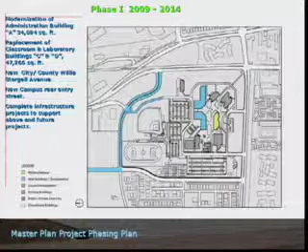In each phase of the project, you're going to have to do infrastructure work, which will probably be talked about later when Chevron talks. That's a major issue - in all the campuses there are infrastructure projects that have to take place. In order for these projects to work, the new buildings as well as the modernization of existing buildings are all going to need infrastructure upgrades to accommodate it.

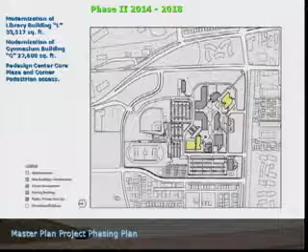The next phase are projects that are actually in the queue and have been sent into the Chancellor's office before - the modernization of the library, Building L, and the modernization of the gym, as well as the redesign of the center core of campus, which would occur as part of this phase, the expansion of that work.

And then the last phase is to complete all the pedestrian entries that we're talking about. And then we have a couple other proposals that have to do with this last phase, which again have to go through a process to determine.

One of them is, because of this new entryway into the campus - you can currently get into campus that way, but it's kind of a back way now - you currently have your diesel building right there, that's highlighted here. We're proposing to relocate the diesel building to this location adjacent to the auto shop building, so you create this core of auto-related functions that all occur together.

We build the wall around it. We also take away the existing cars that you have stashed in the parking lot here, to clean up this parking lot so it becomes a space that's usable and functional. So you contain all those auto-related functions behind a wall that's enclosed and not out in the open, and not a major eyesore for the campus.

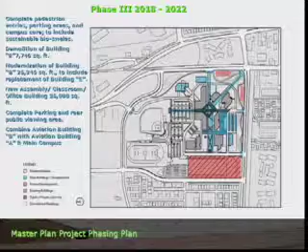And so you create this zone of auto, diesel, and repair work. The potential exists in this area for some kind of signature building that becomes another focus point as you come into the campus and look across. One of the ideas is that there's potential in the future for some square footage for an assembly classroom building to occur at that location. So we're proposing this as a future building location.

Then we talk about completing some of the parking work that needs to be done, and the possibility even of moving some of the aviation functions, not all of them, from here onto the campus into this core area as well. And then there's also the possibility, if this campus grows even more, that you have building areas here and here.

A third thought is in this area where you have the large parking lot. One of the discussions we had was about public-private partnerships and the ability to create zones on each of these campuses that can be used for some form of public-private partnership, or some way the district can develop land that can generate income for them, other than having to live off of the state only.

So one of the ideas is to take this quadrant, relocate the Child Development Center, the CDC - that can be relocated into an area over here, or here, or here - and take this swatch of land and have it available for some kind of future development with some other partner. That's one of the ideas. In each of the campuses, we looked at the possibility of some form of public-private partnership occurring. And so that's the final plan for the campus.

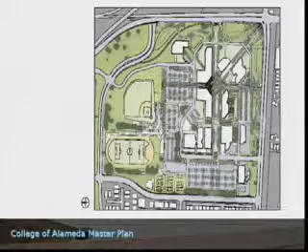Okay, now Merritt College is the next one. Again, we had town halls at Merritt. Some of the same issues exist at Merritt regarding the identity of the campus, wayfinding on the campus, difficulty finding your way around, and not having a really defined quad or center to the campus. Some of the same issues you had at Alameda existed at Merritt as well. And they talked about trying to build out some of the facilities, particularly some of the athletic facilities they had, and some of the things that were in the original master plan for the campus.

These are some of the students who were part of that process, and they had some recommendations regarding movement of some of the facilities, including the student center, to a more centralized location, which we'll talk about in a moment.

And again, the same process of assessment and analysis to come to a facility master plan. These are the areas of concern: define the main entrance, wayfinding on the campus, define the core of the campus. Taking advantage of the views is very important at Merritt, because that's one of the real attributes that campus has - the natural environment around it and the views you have from it. This is the existing campus itself.

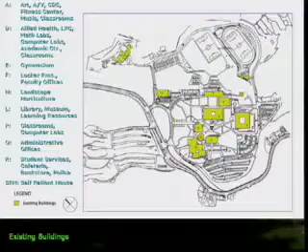Again, a view of the campus in its environment. The zoning map for the campus. Basically, it's all campus, all institutional up there.

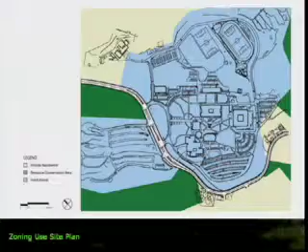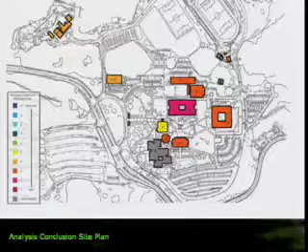And this is the assessment that was done, the physical assessment of the campus. Blue being the best buildings, going down to red being in the worst condition. The R building was not assessed because at the time they were just completing the modernization of the Student Services building, and some of the portables were not assessed. Again, the buildings are, as you can see, not in great shape in terms of what needs to be done to them.

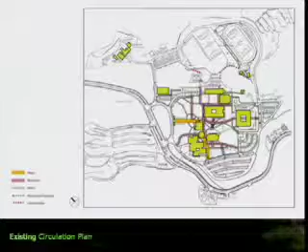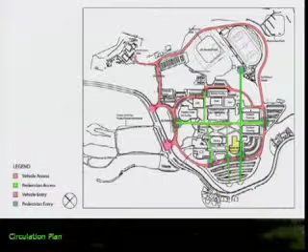This is the current pedestrian circulation on the campus. This is how we're proposing to reorganize some of the major circulation patterns on the campus to make it a little more defined, a little more reasonable and sensible, and establishing a center to the campus in the process.

This is the landscape plan where you can see we're beginning to put the center of the campus here. It's got obviously very lush all around the campus, and then the major walkways coming across, connecting across the campus and connecting back over to the parking lot.

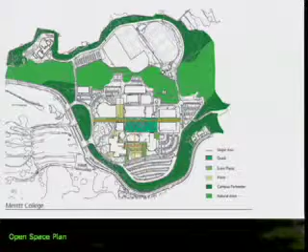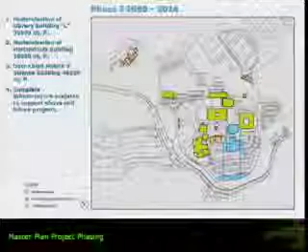And this is the overall master plan that we've developed for the campus. These are the phases that it goes under. First phase that we're looking at is the modernization of the library, which is currently in design now. You have that ongoing, which is right here. And then what's also on the plans is the modernization of the horticultural building. But the major one is the new Allied Health and Science building, which is the current discussion -- there will be a new building that will be built for the Allied Health building to meet all the criteria.

Initially, I think the discussion was going to go into the D building. It's now decided it's going to be a new building. That's the recommendation at this point. And then all the infrastructure work that needs to go on as part and parcel of that.

What was that blue area at the bottom of the line? The blue area at the bottom.

That's an area that we looked at, trying to take advantage of the views on the campus. One of the things that currently happens there now is people sit out on the little guardrail that's there at the parking lot and look out at the sunset or look at the view. So we're saying one of the real things you have at the campus is the view, so let's utilize that, take advantage of that, create an area where people from the community, from the campus, can come up to the campus and enjoy being there. So we've basically taken the end of the parking lot and created sort of a little vest pocket park, essentially. There'll be some seating there, so you can stop and stand and look at the view, enjoy the view, and it connects back with walkways that connect all the way back into the main campus.

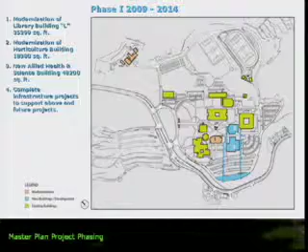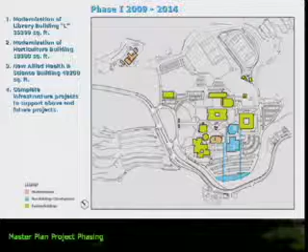Oh, okay, let me back up one more. Specifically where it is: this is the current Student Services building, and this is the library. And the President's office is right here. So this is that area that's right in between.

This is the A building, the one with the donut in the middle. This is actually a building which we're proposing to tear down as part of this process, to take this A building down. And then we're going right here in this space in between those. If you know that, it is right to the right of the library, of the parking lot. And the hillside goes down, so the building would step down the hillside. So it started at grade level, and then this portion of the building steps down the hillside as you go down. Okay?

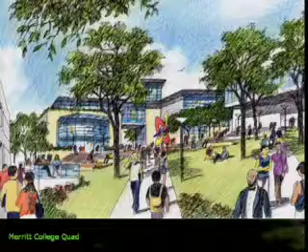And that's the view of the same building from the other side, from the central quad area. This is the existing D building. The library's right here, the existing library's here. And then this would be the new Allied Health building, which again would connect through -- there's a new parking area on the other side of this building. So we connect through to that parking area, and then you go back up the hill to the front, to the main lot on the other side.